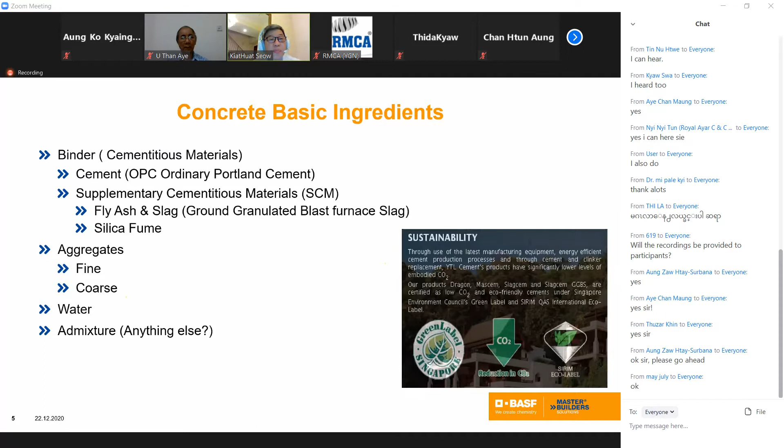So we can actually divide concrete into two phases: first and foremost the cement phase, and then the aggregate phase. So you combine the two to become concrete. That's how you will do it today.

Okay, give you a bit of history of concrete. Concrete is not new - concrete had been used by the Romans many years ago, about 6,000 years ago. Look at the pyramids and some of the construction that's been going on for a long time. But in the modern world, I think it's very important for us in the concrete industry to know a little bit of history. Portland cement was invented by Joseph Aspdin in 1824 in the UK. Why called Portland cement? Because the material he invented looked like a material found in Portland, England. That's why he called it Portland cement.

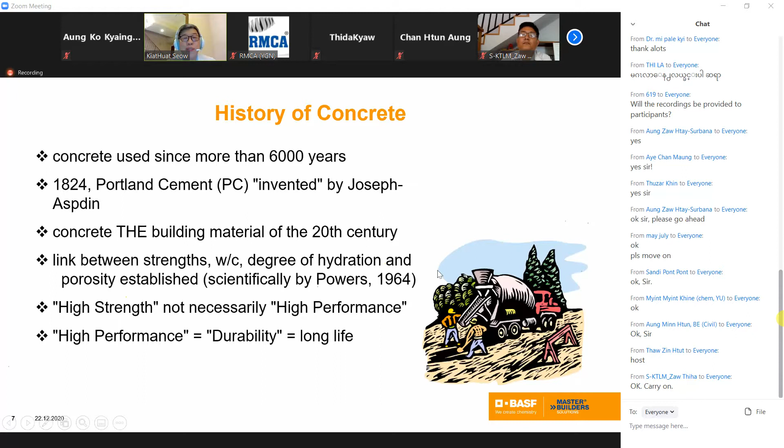Okay, so let's go to a concrete mix. What's the property, what's the objective? What are we trying to achieve when we design a concrete mix?

I think designing a concrete mix is very important. We could take account of many factors. Okay, let me go through what your objective is.

Number one, we want to make sure we design a mix - basically a concrete mix is quite straightforward, you only have about 4 or 5 components. You have your cement; sometimes you have your SCM, sometimes you may not. But for simplicity's sake, let's just talk about the cement first, then the aggregate, coarse and fine, then you have your water, and maybe the admixtures.

So basically, we want to make sure we take all these components in concrete and ensure they meet certain objectives.

The first one is called strength. In any situation, we must meet the strength requirement, because the engineer who specifies the grade of concrete has done his calculation and makes sure you meet the strength requirement. That's the basis of why the concrete exists - to ensure the structure stands according to your requirement, the strength requirement, to support the load and the weight.

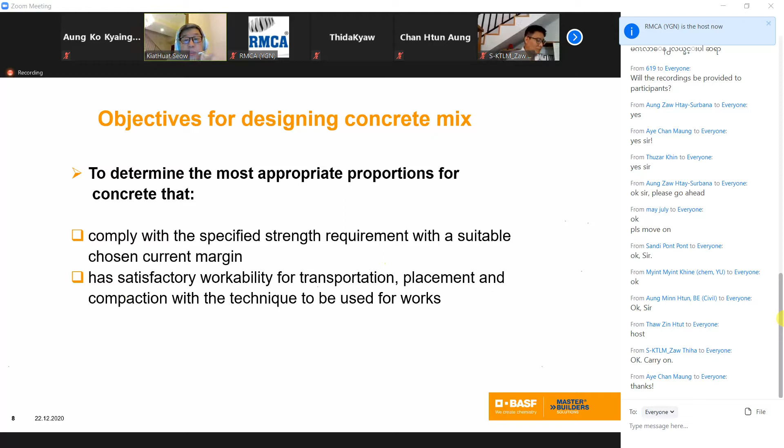It must also have a certain level of ability to compact, depending on the technique you're going to use. So a concrete that we call SCC, self-compacting concrete, will be very different from a normal slump concrete. It depends on what you're going to do with your concrete - if you're looking for SCC, you design very differently; for a slump concrete, that's quite different; for something very dry like RCC, that's quite different too.

You also need durability and appearance, and you design a mix that will meet your durability requirement. For example, 100 year durability or 50 year durability are designed quite differently. If you design for a structure near the sea versus inside the land, it will be quite different. If you design concrete to withstand earthquakes versus non-earthquakes, the mix will be quite different. So there's a lot of factors you have to take into account.

And finally, we're all here to make some money, so you have to design to meet all these requirements - your strength requirement, your workability requirement, your durability requirement - as economically as possible. Taking into account the production and quality control method you use, the equipment that you have. So all this has to be taken into account when you design a mix.

So when you talk about a mix, it's not so straightforward as saying, oh yeah, I want a grade 30. A grade 30 is easy because that's only the strength requirement. Then you have to discuss what sort of slump you need, and what sort of equipment you use to place your concrete. You also have to look at the durability aspect of it, and finally you look at the cost part of it. So that's how you try to design a mix.

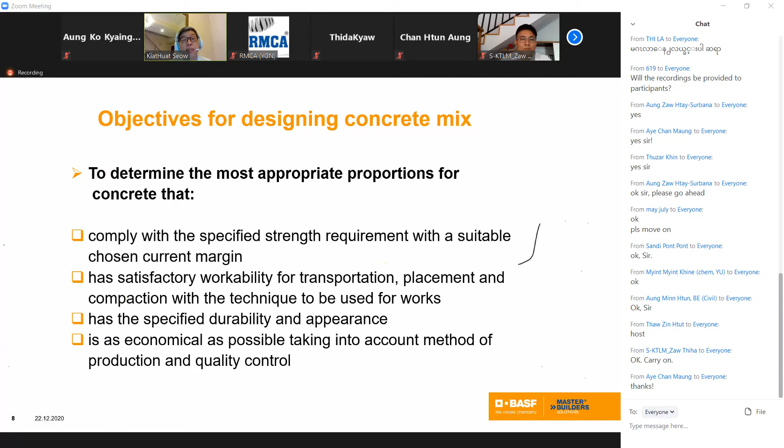So let's be very careful - please don't think that if I want to design grade 30, then my water cement ratio is 0.5. It doesn't work that way. It depends on your material. Some good cement, yes, some bad cement, you may require a lower water cement ratio. Use a better admixture, you may require a higher water cement ratio - you may not need such a low water cement ratio to meet a certain strength. It all depends on your material and what you use. So a lot of factors can influence your water cement ratio curve.

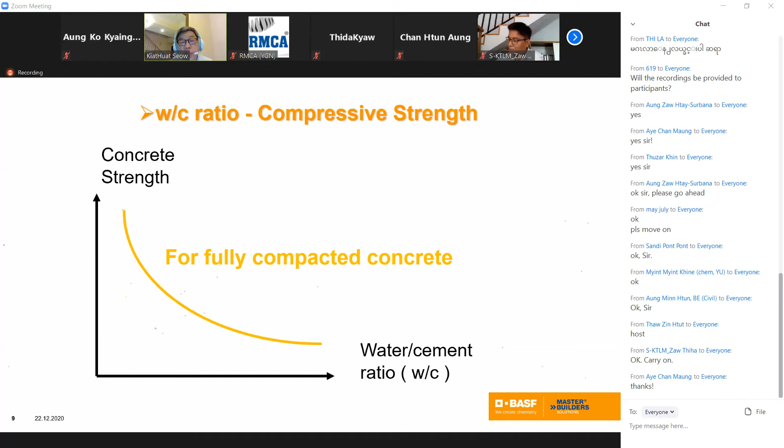Okay, so this is water cement ratio versus your concrete strength. This is quite important - I think all of you should know this water cement ratio curve quite well, but don't take it as one line representing all your concrete, because many factors will influence your water cement ratio curve. You can see here, that's 1 day, 3 days, then 28 days. So as your water cement ratio goes down to 0.3, your strength goes up. For example, at 0.5, you'd probably get grade 50, 50 MPa, at 28 days.

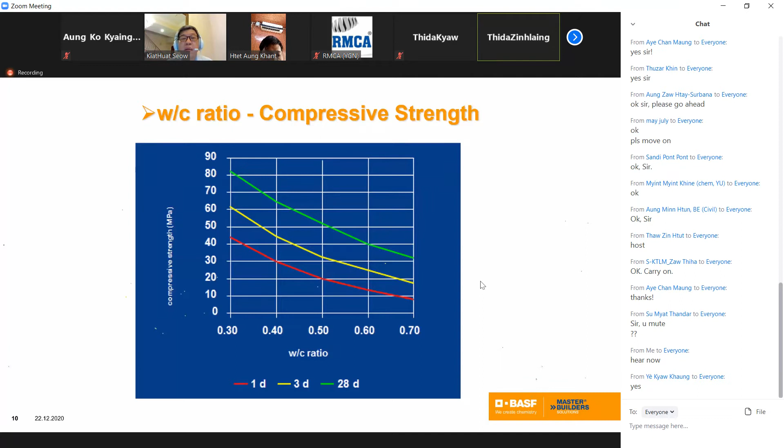As I mentioned earlier, when we study concrete, there are two parts to it: the aggregate and the cement mortar. That's how it looks. We look at the aggregate and cement mortar, and how they influence the properties of concrete.

This is what we call aggregate packing. We want to pack in as much aggregate as possible. If you look at the aggregate size here, this is your big aggregate, then the smaller aggregate, and finally the sand component.

So what we do here is pack in as much aggregate as we can, so that we can reduce the amount of cement mortar. The reason is simple: cement is the most expensive component inside your concrete mix, so we want to reduce the cost. The more we increase the space occupied by the aggregate, the less cement mortar we need.

The other factor is this: cement mortar, or cement, is the only component in the whole mix that undergoes a reaction. When it sets, it will shrink, and it also gives out heat. When cement and water mix together, there's a reaction called hydration. So we also try to reduce the hydration heat coming out from the reaction, which causes the shrinkage.

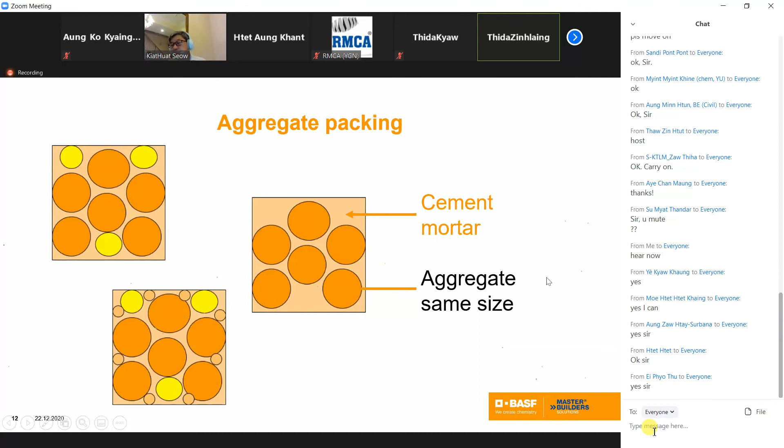Okay, and then you can move to the next two slides. After that I can summarize. So that's why you look here at the packing of aggregate.

That's why we use what's called graded coarse aggregate, cement mortar, sand mortar. So what we're trying to do here is pack in as much aggregate as possible and reduce the amount of cement mortar inside, so that we have a good mix.

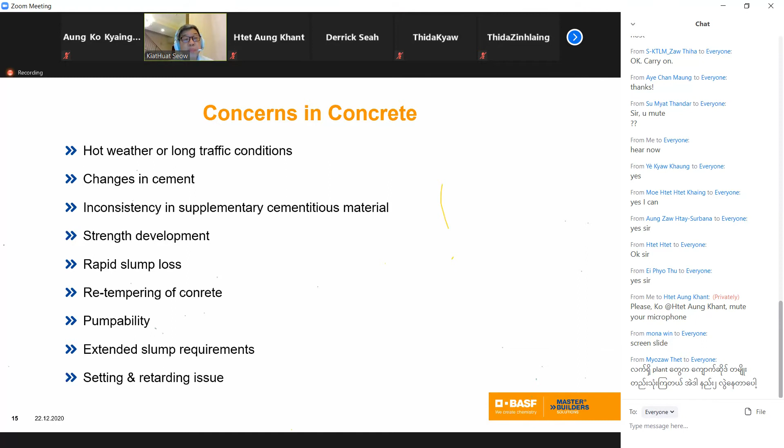Okay, so basically in summary, material-wise, concrete makes use of cement, aggregate, water, and admixtures to produce wet concrete. The wet concrete becomes hardened concrete and then mature concrete. So concrete goes through a phase, like us humans when we are born. As a wet state, there's a requirement to make sure it meets a certain requirement for the wet stage. Then when it hardens, it also requires a certain requirement. Then finally the maturity part after 28 days.

So the process, as mentioned earlier, there's a mix design requirement. Then you're able to mix it, transport it, place it, compact it, and finally the curing part. We will take all this into the next session also.

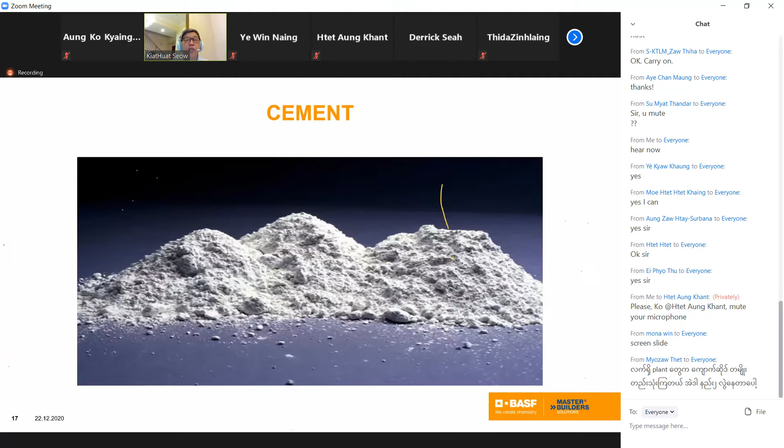Okay, let's go through the material now. All right, I finished the basic concrete technology part, I didn't cover too much. So for you to understand what the concrete material is, now we go a little bit into the depth of the material. Let me start with cement. So cement is the main binder component. Without cement, you cannot call it concrete. Cement is the one that binds everything together, or bonds things together. It gives you the glue. Very important material.

So what is the history? I mentioned to you earlier, we must thank this person. Without him, there's no concrete. In 1824, he was granted a cement patent. I mentioned earlier that he called it Portland cement because the material he created, a gray material, looked like some building stone near the Portland stone field. That's why they call it Portland cement. So you understand a bit the history, how it came from.

So the definition of cement: it's a solid definition. It's a binding material. We can bind particles of aggregate together, similar to glue binding two pieces of paper. So it's similar like your glue or epoxy glue that sticks things together. Cement is the same thing. It's the one that binds the material together to give you concrete.

So these are some of the materials for making cement. We don't have to go through that now. Basically, just for understanding, it makes use of limestone, clay, silica, gypsum. It goes through a process of grinding and then heating up at a certain high temperature to give you a material called clinker. Then it's mixed with gypsum to give you what we call cement. So the process is basically this way.

So you've got the lime, silica, aluminum plus iron. This material goes through a process to give you clinker. Clinker plus gypsum, because clinker sets very fast, so we need the gypsum to retard the setting time of the clinker. So clinker plus gypsum will give you cement. That's basically the production of cement: using certain raw materials like lime, silica, aluminum, and iron, going through a whole process of grinding and heating to a certain temperature to produce the clinker, then they grind it down, plus the gypsum, and produce your cement.

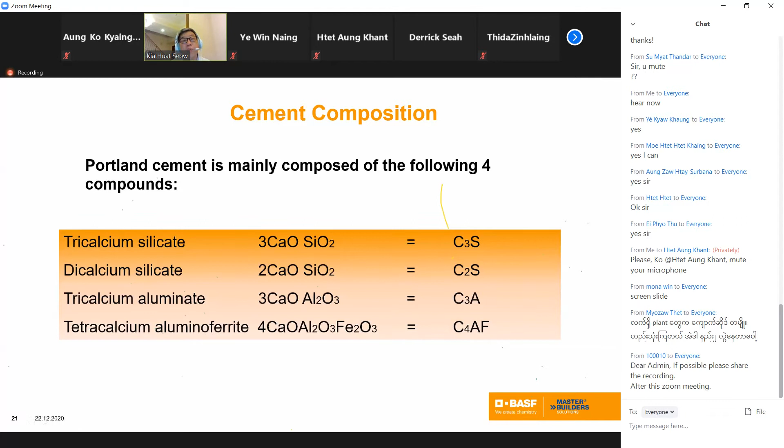On the chemical part, cement is made up of 4 chemical compounds. You've got the C3S, tricalcium silicate, then the C2S, dicalcium silicate. We use the smaller terms, C3S and C2S. Then the tricalcium aluminate, the C3A, and finally the fourth component, tetracalcium aluminoferrite, the C4AF. So we go by these 4 chemical compounds. I'll explain afterward how these 4 chemical compounds influence the properties of your cement.

The C3S is the one that hydrates very quickly, so if you want early strength, this is the one responsible for it - responsible for the early strength. The C3A is the one that contributes the heat and the setting time. The higher amount of C3A you have, the higher is the heat, also the higher amount of your early strength, and also your setting time - the faster is your setting time.

The C2S actually hydrates slowly, so it gives you the late strength. So anything beyond 7 days, the C2S will give you that strength. The C4AF actually contributes very little to strength - basically it gives you the color. The more C4AF that you have, the darker is the color.

So basically these are the 4 compounds, and each contributes to a property in your cement. The C3S for early strength, the C3A basically for early strength as well as heat, the C2S for the late strength, and C4AF basically contributes nothing to strength, but gives you your color.

This is very important. When cement and water mix together, I think all of us must know it's not called hardening, it's called hydration. Cement and water reacting together is called hydration. And when there's hydration, there's heat coming out. So this reaction of cement with water is exothermic, meaning that heat is liberated out.

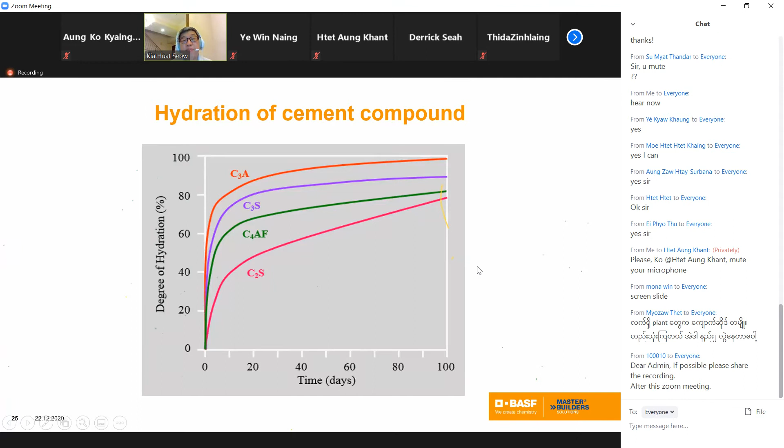Uses of cement - as a binder, it produces strength. Strength is higher at low water cement ratio, as I mentioned - lower the water cement ratio, higher is the strength. Cement is also used to protect steel.

I think a very important discovery in the early 1900s is what we call reinforced concrete. Reinforced concrete came into existence somewhere in the mid 1800s. People discovered that putting steel and concrete together makes a very useful material, because concrete is very high in compressive strength but very low in tensile strength. So by putting reinforcing steel inside, you have both - the steel gives you your tensile strength, concrete gives you the compressive strength.

And the cement inside the concrete will protect the steel from rusting. The high pH protects the steel from rusting. So you have better durability at lower water cement ratio - if you've got very high strength or very low water cement ratio, it prevents water and other chemicals from coming into the concrete to attack your steel bar, and that's where you get good durability, or higher durability.

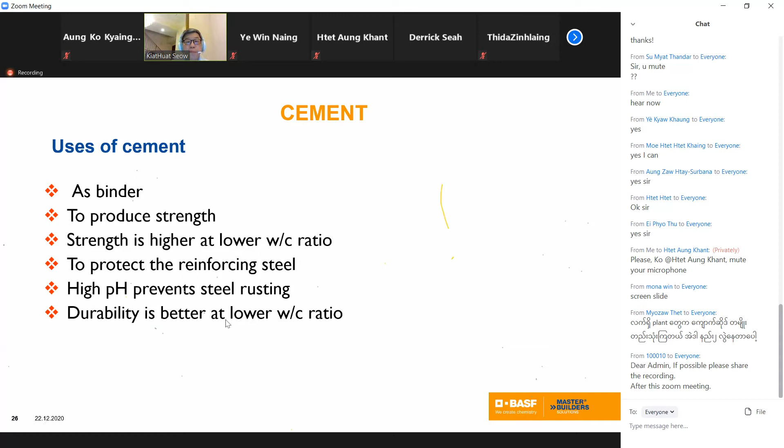Zing, you want to discuss a little bit of cement with them? You can move on. That's the supplementary cementitious material. Then I will wrap all of that. Okay, sure.

Okay, we come to the supplementary cementitious material, what we call SCM. The first one we will discuss is fly ash.

Fly ash comes from coal. When you burn coal power, whatever is emitted is ash coming out. You can capture the ash, but it goes through a whole process - it's not straightforward. The coal comes in, there's a boiler, then flue gas, and it comes out the exhaust. You must be able to capture the ash coming out, and this ash has to be treated with some process before it can be used in concrete.

In ASTM, there are two kinds of fly ash: Type F and Type C. Type F has lime less than 10%. Type C is greater than 20%. We are more interested in Type C than Type F. Both can be used, but Type C is more reactive, so it gives you better strength. So we are looking for Type C, but fly ash basically comes from your coal-powered power plant.

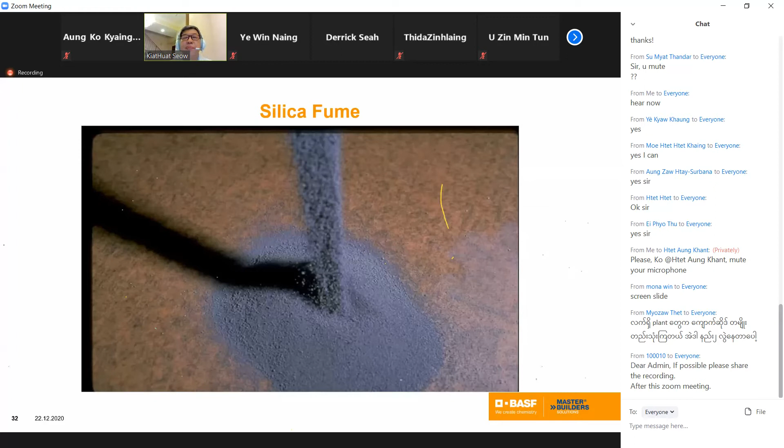So it's a byproduct of silicon metal. It's 100 times finer than your cement - you can feel very fine powder. So it's also very reactive. Like cement plus water gives you CSH and calcium hydroxide, the silica fume also reacts with calcium hydroxide to give you more gel, a stronger gel. So the reaction is very strong for silica fume.

So if you want to produce very high strength concrete, you must have silica fume or it will not work. You're talking about maybe grade 80 and above. In certain countries, even grade 60 and above needs silica fume. If your cement quality is not so good, you need more silica fume to make it work.

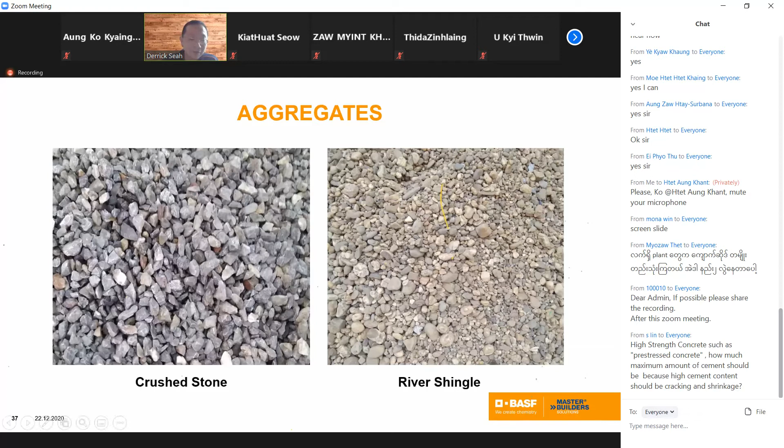What is silt? Silt are those powdery materials. Generally, you will find them on the surface of your coarse aggregate, your crushed stone, or it also appears in your sand as fine powder.

And last but not least, the organic matter. It refers to what you normally see in your sand, like dead leaves, dead branches, even some dead fish. I've even seen seashells, some shells in your sand. So by right, all the aggregates should be free of those silt and organic matters. Okay, next.

What is the function of aggregates? It basically provides the bulk. It's the majority of the concrete, so it gives you the volume of your mix.

Of course, it also imparts durability because most of your aggregates are non-reactive. For us in this region, we are using granite as our crushed stone or river sand, which is silica in nature. Then there are probably some cases where the sand are slightly reactive, so that is something to take note of. But generally, your aggregates are supposed to be non-reactive.

That's why whenever there's attacks, we heard from the Seow just now, sulfate attack or chloride attacks, normally the attack part they will go for is the cement paste. That's why the aggregates is there to give the durability.

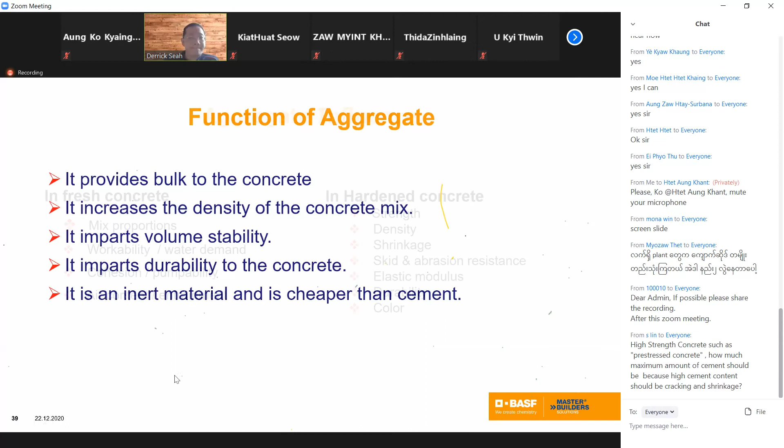Some influence, if you choose different aggregates, you may influence your properties, be it fresh concrete or hardened properties. In the fresh concrete, you will find your aggregate influences your mix design proportion. If it's too much coarse aggregate or big stone, you will find the concrete is very harsh, very coarse, because there's too much stone. On the other side, if there's too little stone or too much sand, you'll find the concrete becomes very sandy, a mortar mix rather than a concrete mix itself.

They will also affect the workability and water demand, especially water demand, which is interrelated. If your aggregate is of poorer quality, you will find the water demand of your concrete using this kind of material tends to increase, or you'll find a much drier mix. The worst case, if you add more water to it to get back the same workability, that will affect your durability or the strength of the concrete.

Cohesion and pumpability: if your aggregate is too angular, if your crushed stone is compared to river shingles, you'll find that river shingles is much easier to pump because it's rounded, whereas your crushed stone is more angular. That will affect your pumpability.

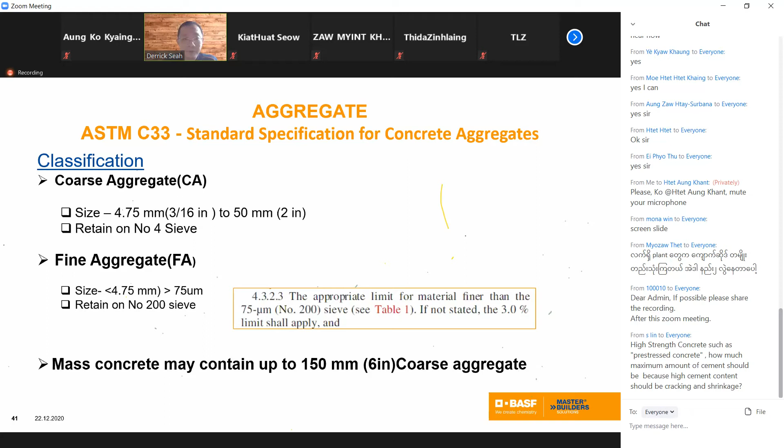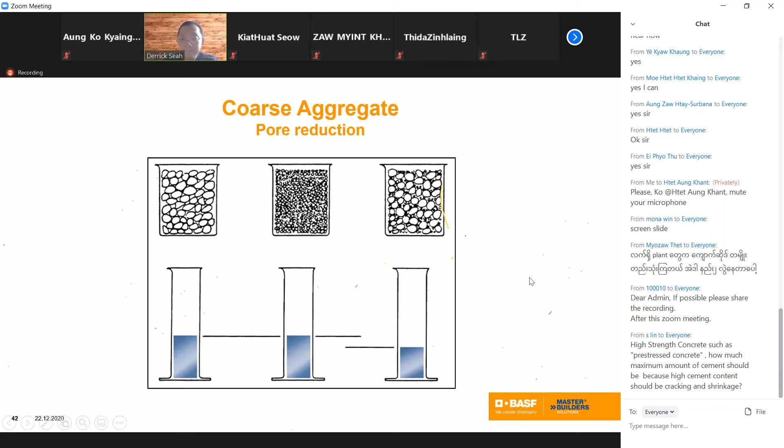Just to talk - probably not that much for Myanmar, but in other parts of the world - getting natural aggregates is getting more and more difficult. There are old buildings being torn down, and they want to recycle this, that's where you have recycled concrete aggregates as well. This is where old buildings are broken down, then crushed, sieved, and probably recycled back into concrete.

In Singapore, I think there's a limit of not more than 10% of this kind of recycled aggregates. The reason is, when you break down the concrete, there is some mortar that is stuck on the surface of the aggregates, and this mortar actually creates a lot of pores, a lot of holes.

In the next few slides, I will show you the absorption rate for this kind of recycled aggregates. Water absorption is much higher, the porosity is much higher, and of course the strength is also much lower compared to the natural one. Okay, next.

As a guide, for simplicity, normally we refer to fine aggregates or sand as less than 5 mm. Just now I mentioned more than 5 mm, we consider them as coarse aggregate or stone.

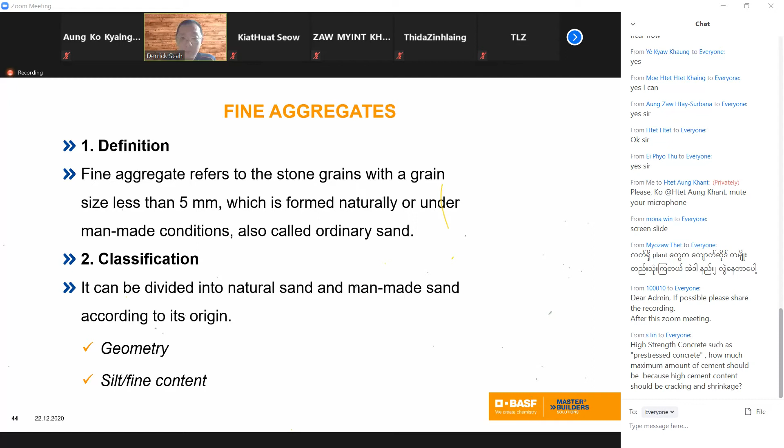They are still divided by two portions: geometry - whether the shape or size is rounded or angular - and the next item will be silt content or fine content, where it's passing less than 75 micron, those are the powder material. So for sand, these are the two main things you need to look out for: the geometry and the fine content or powder content in the sand. All right, next.

Okay, here you got the picture of the sand. The top part is the natural river sand, whereas the bottom one is more powdery, grayish, from the crushed stone. We call it crushed rock fine, CRF, or manufactured sand. These are man-made sand, generally lower than 5mm. We call it fine aggregates or sand, and in the mix design, they normally account for 35 to 45% of your total aggregate content in the concrete mix itself.

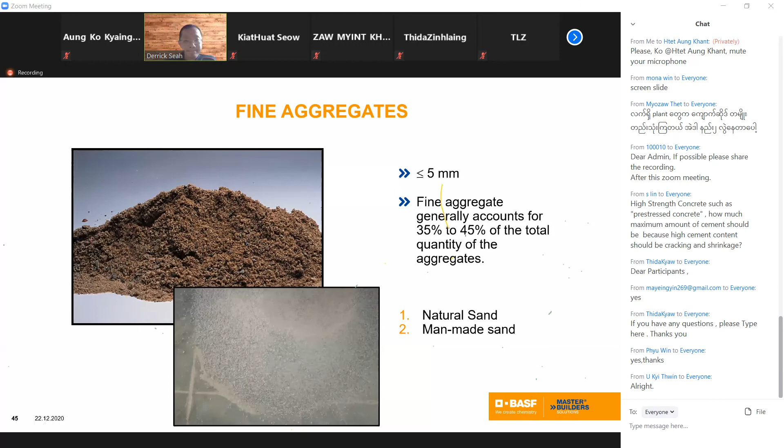When we talk about fine aggregates, one important term is to find out the fineness modulus. What does fineness modulus mean? When we talk about sand, how fine or how coarse the sand or stone is, we normally ask what is your fineness modulus, because it will give you an indication when you do the sieving of how fine or how coarse your sand is compared to others. Fineness modulus of 3.1 to 3.7 is considered coarse sand. As the number gets smaller, it means your sand is getting finer and finer. So it's an indication of how coarse or how fine the sand or aggregate is.

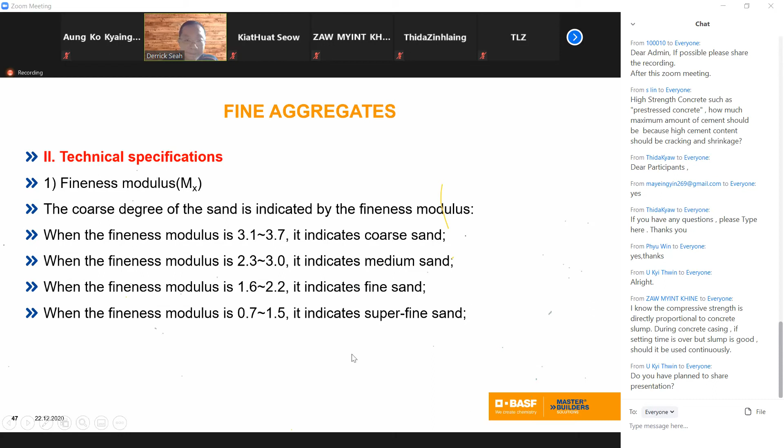Zing, am I talking too fast? You want to go through, or you want to translate first until this point? Sorry, I've forgotten about Zing. Did I, Zing? Yes Derrick, you can go ahead, and then I will explain after you, because the time is limited. Sure, okay, you can go ahead.

Next, you always do a sieve analysis. After you do the sieving, you will plot them up onto the curve to find out whether it's on the upper limit or the lower limit of your curve. Theoretically it should fall within the upper and lower limit. So if you got a source of irregular fine aggregates, then you have to mix and match another source to get the curve into the position that you wanted.

Just to go through again, fine aggregates give you the bulk and uniformity of the mix. It actually forms part of the cement paste, as the cement mortar to hold the coarse aggregate together, and to prevent any segregation of the coarse aggregate. So if you do a mix without the fine aggregates, just coarse aggregate and cement paste, you will find that the mix will definitely segregate. That's why you need fine sand in between to hold the coarse aggregate and prevent segregation.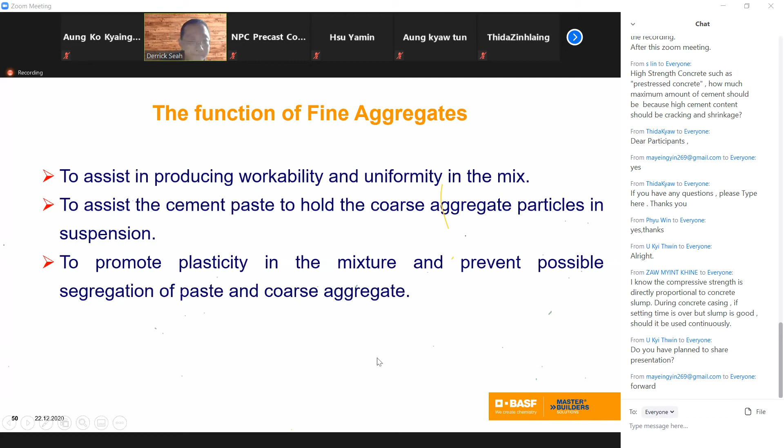The last portion on the aggregates, which is important, is the moisture content. Every time when we do concrete mix design, it's always based on the SSD condition, saturated surface dry, in order to calculate the concrete mix design. What is saturated surface dry? It means that it's neither absorbing water nor contributing extra water to your concrete mix. That is SSD. So whenever we do concrete mix design, it's always based on SSD condition.

Because of that, whenever we batch our concrete, we always need to measure the moisture content in your aggregates. Why we measure the moisture content is to take into account the extra water or moisture that is absorbed, coming from your aggregates itself, and that will affect your water cement ratio of the concrete mix design.

So next slide will show you, this is an example of your aggregate itself. The first one shown is oven dry, so inside the aggregate and outside the aggregate is dry, totally dry. The next one is air dry, which means outside of the aggregate is dry, but actually inside is still contains some moisture, it's still wet. So only outside is dry, that is air dry.

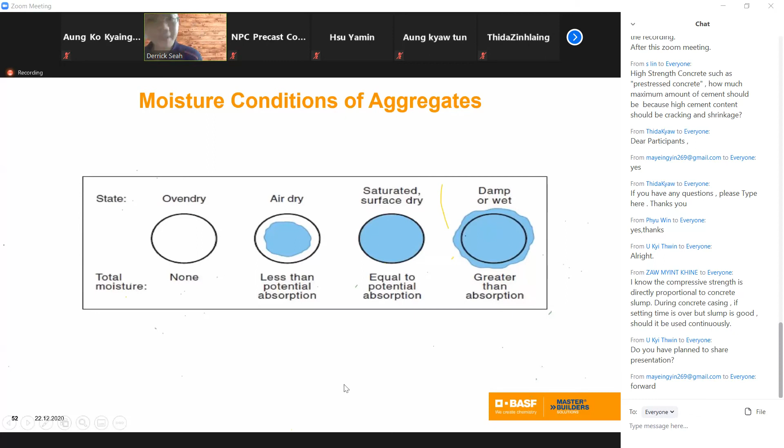Okay, for water, we are always asked what type of water is suitable for concrete production. What we always tell is whatever you can drink can be used to produce concrete. But what about water you cannot drink? Can it be used? Yes, you still can use it, but you probably need to do some trial mix to ensure that water not suitable for drinking doesn't have impurities that will affect the fresh concrete properties.

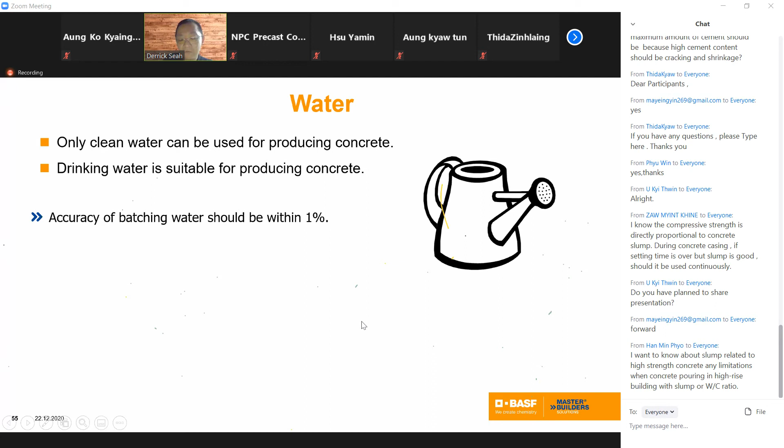So clean water should be used for producing concrete, and of course drinking water can be used. The accuracy for the batching of water should be best within 1%, because that will affect your water cement ratio, and indirectly your strength development.

There are other sources of water. Seawater, can you use it for concrete? Yes, you can, provided there's no rebar or reinforcement. Seawater sometimes brings setting time problems to your concrete because there's chloride inside, or there's a high amount of organic content in the seawater. So if you really don't have a reinforcement or corrosion issue, you may want to try out seawater, if the setting time is not an issue.

Of course, there's others like industrial wastewater and recycled water. Both, we recommend you do a trial mix first to confirm there's no harmful effects to your fresh concrete properties.

Last topic we come to is chemical admixture. It's classified as ASTM C494, types A to G. The most common, type A, is water reducing, just a water reducer. B is the retarding type. C is the accelerating type, less commonly used in the world.

In Myanmar, I think the most used is type A, water reducing type. Type D is water reducing and retarding type, because of the hot weather we have in this region. And of course type F for precast, high range water reducing type, and type G for high range water reducing and retarding. The less common one is the accelerating type.

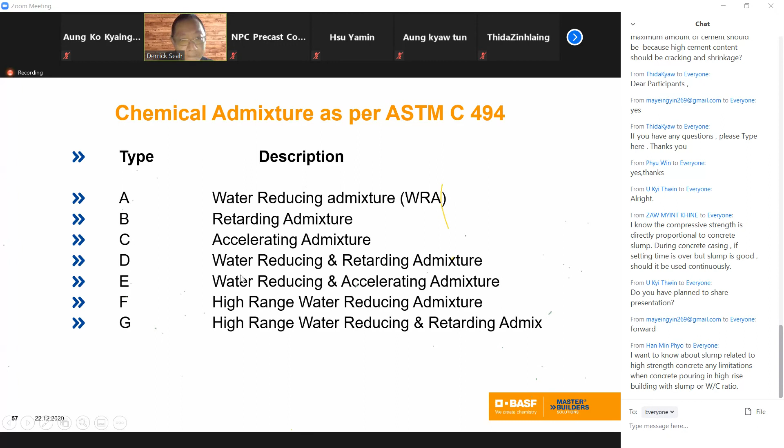Some quick history: in 1935, lignosulfonate and naphthalene sulfonate were used as plasticizer for concrete - these are the two main ingredients used for admixtures. In 1945, air entrainer was used in the United States, because of the freeze-thaw reaction.

In 1955, plasticizers became very common, and all concrete was using plasticizers. In 1966, the second generation of admixture, superplasticizers of melamine base, was introduced. In 1986, we got PCE, polycarboxylate, first introduced in Japan. Then in 1992, polyacrylates was introduced in Switzerland. Then from around 1997 onwards, PCE, polycarboxylates, was introduced in Europe, and I think they have been using this until today.

The difference between different types of admixtures mainly comes down to the water reducing effect, as well as retarding. The first generation, lignosulfonate, can give a water reduction maximum up to 10%. The second generation, naphthalene and melamine sulfonate, up to 25%. The latest, third generation, PCE, polycarboxylate ether, up to 40%. That's how we can produce higher strength concrete, through the use of polycarboxylate ether.

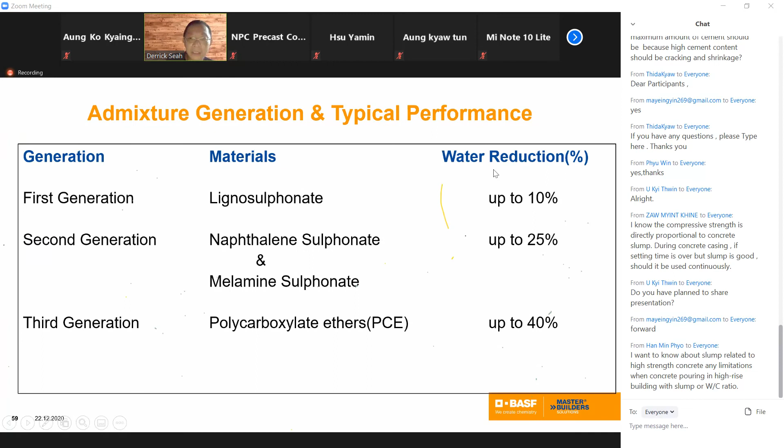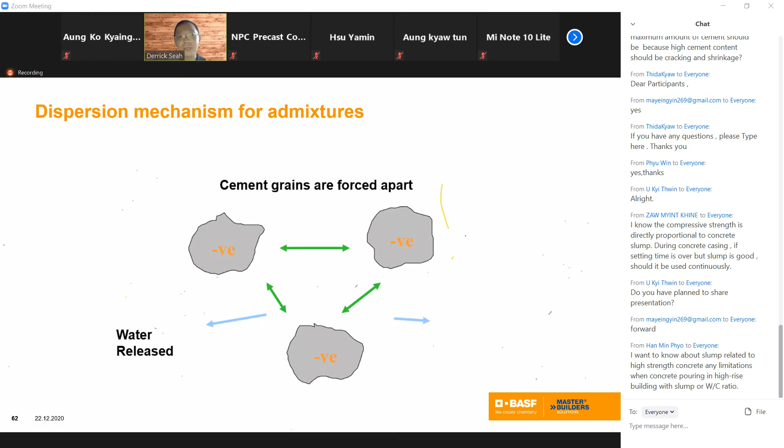Admixtures, when added to the concrete, cement, and water, actually adsorb onto the surface of the cement. These admixtures normally give a negative charge to the cement particles, and like magnets with the same charge, they repel each other and force apart. When they force apart, the water that was originally trapped inside is released, and that's where you see water reduction. It's giving the cement grains a negative charge, forcing them apart and freeing the trapped water.

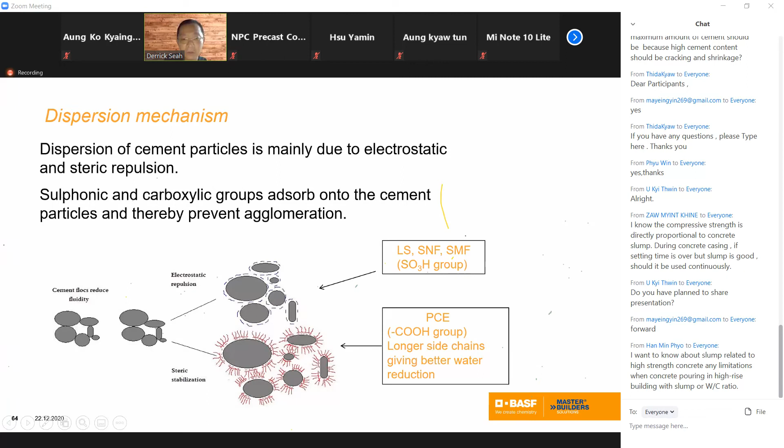Next, I'll briefly go through the effect of PCE, and why polycarboxylate, the new admixture type, has better or stronger water reduction. On top, the negative ones are the first and second generation admixtures, which only give negative charges to repel the cement. The new PCE contains a side chain, or 'hair', a long chain. Because of this longer side chain, it pushes the cement particles further apart. That's why you can reduce even more water, giving higher water reduction because of these longer side chains in PCE.

Now, even among PCEs there are different generations. With the newest PCEs, we can actually design the molecules to give higher water reduction, better workability, or better retention properties to the concrete admixtures—to achieve the performance you want: high strength, high water reduction, and longer retention properties.

That's all for the presentation today. This is just a short quiz with some questions we think are commonly asked. If you've listened to what Seow and I covered in this session, you should be able to answer them all easily.

The first question: what is concrete? Because of time, we'll just review the answer, which you've already gone through. The answer is a combination of cement, aggregates—fine and coarse—water, and admixtures.

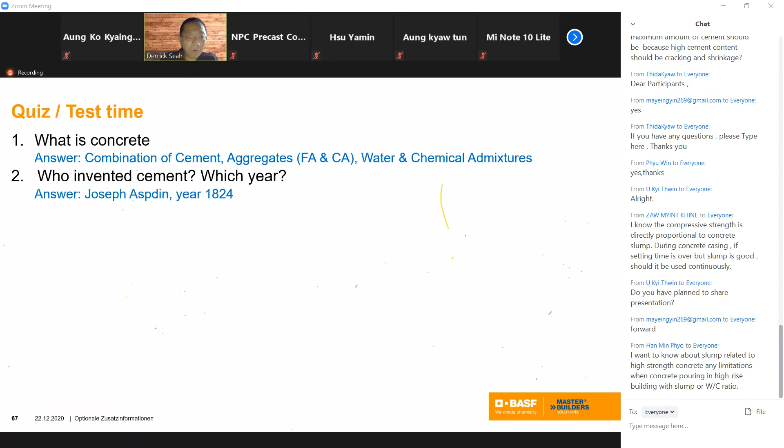Third question: some examples of supplementary cementitious material, SCM. There are three: fly ash, slag or GGBS, and silica fume. Seow also mentioned that Myanmar has some natural pozzolan that can be used as part of the supplementary cementitious material as well.

Next question: how many percent do aggregates occupy in the concrete mix? As covered, the answer is 60 to 80%—that's the portion of the concrete mix occupied by aggregates.

Next question: how do we classify coarse aggregate and fine aggregate? Simply put, coarse aggregate is normally retained at 4.75 mm and above, while fine aggregate is 4.75 mm and below.

Next question: what does SSD stand for in aggregates? SSD stands for saturated surface dry, meaning the surface is not dripping water, while inside, the aggregate has already fully absorbed the water.

Last question: what is the ASTM classification for chemical admixtures? It's ASTM C494. These are some common questions we think are a good way to end today's session as part of the recap.

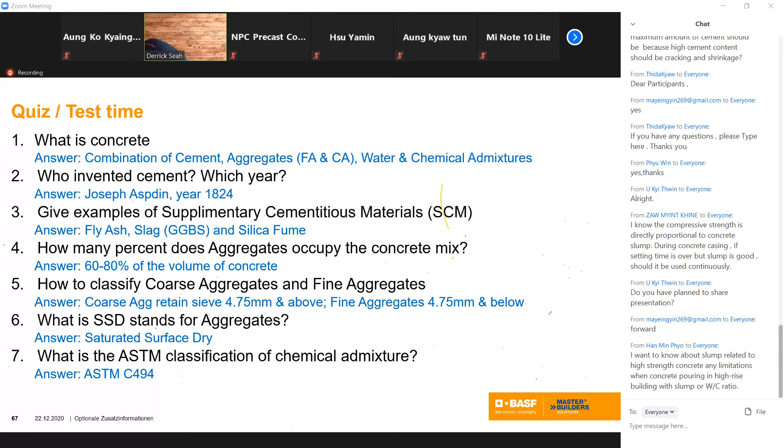Thank you, Derrick, for your presentation on aggregates and admixtures. I will now summarize all of the aggregate and admixture content.